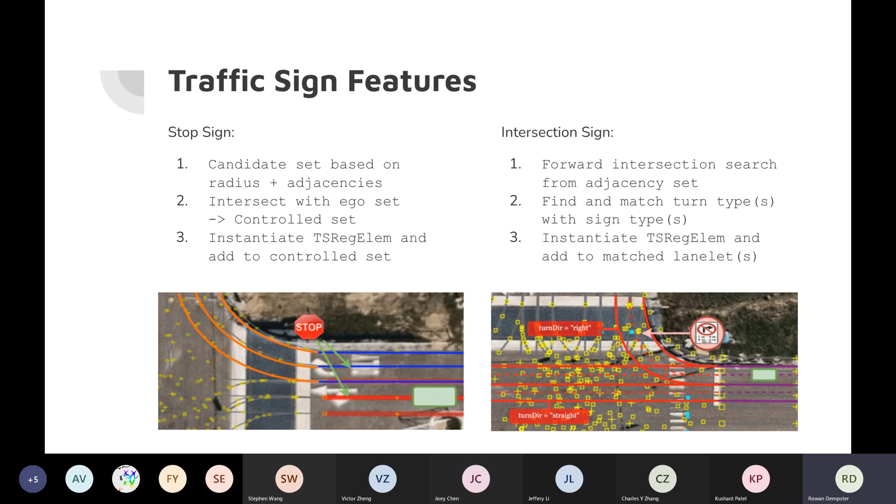And after we have these intersection lanelets, we match the type of the observed traffic sign to the intersection lanelets that it would influence or regulate. So a no right turn sign would, of course, regulate a right turning lanelet because it's applying a traffic rule to that lanelet, which is saying this lanelet is no longer passable. You cannot drive through it according to this traffic rule. So again, we instantiate a Lanelet2 regulatory element. And in this case, we would add that regulatory element to this lanelet. And in that way, we would model the relationship between the online detected sign and the a priori lanelet map.

Okay, so this technique expands to other heterogeneous features. So not just stop signs, but for example, construction blockages. It has a relationship with the lanelets that it is blocking.

So we first do some logic to check which lanelets the occupied area is blocking. We see if it's blocking all of the adjacent lanelets, so we wouldn't be able to simply switch lanes and avoid the blockage. We ensure that all of the lanelets are blocked. Then if that's the case, we instantiate an occupancy regulatory element and add it to all of these lanelets that

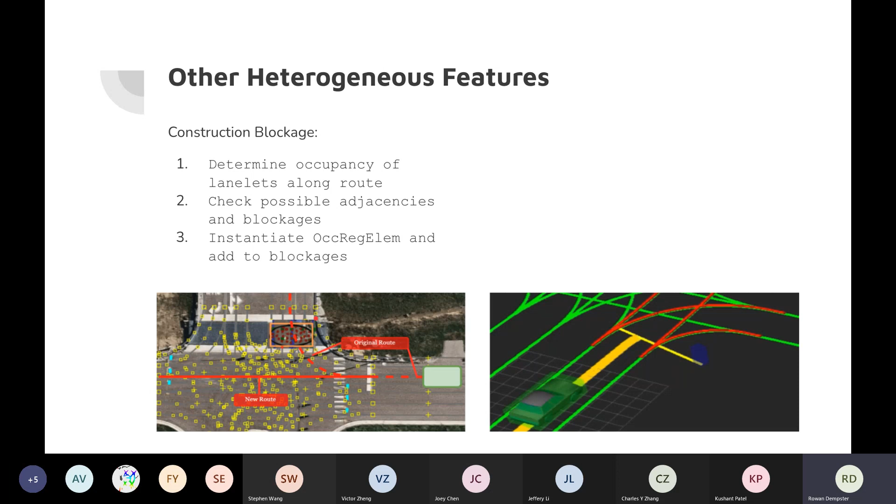are blocked. And in that way, during behavioral planning, we would be able to determine that our current lanelet route, which may have turned to the right, is no longer feasible. And we would be able to replan a new route that does not use these blocked lanelets, and that might go forwards.

And then lastly, we have pedestrian movement. And to model this, we have the predicted trajectory of the pedestrian given by the tracker. We generate a conflict set, which is either the intersection of the predicted trajectory with the bounds of lanelets, or if the pedestrian is stopped and waiting near a lanelet, that's also considered a conflict.

We calculate the stopping points using either the intersection or the closest point if the pedestrian is waiting. And then we instantiate another regulatory element that holds information about the stopping point and add it to each lanelet which is in the conflict set.

So in this way, we've once again created relationships between the online information of the pedestrian track and how it interacts with the a priori model. And we extract the relationship of conflicting from that information. You can see highlighted in red here are those conflicting lanelets.

Okay, this would probably be a good time to pause if anyone has any questions that they want to ask now.

Any other questions about this argument of reducing the complexity of the interaction? All right, so those are the main ideas that I wanted to get across today. Hopefully you have a better understanding of our motivations for having this environment modeling layer and how it's making our behavioral decisions a lot more simple to implement. So I'll just finish off here with a demonstration. This is the multimedia attachment that we're submitting along with our manuscript, and it's demonstrating the pedestrian feature model.

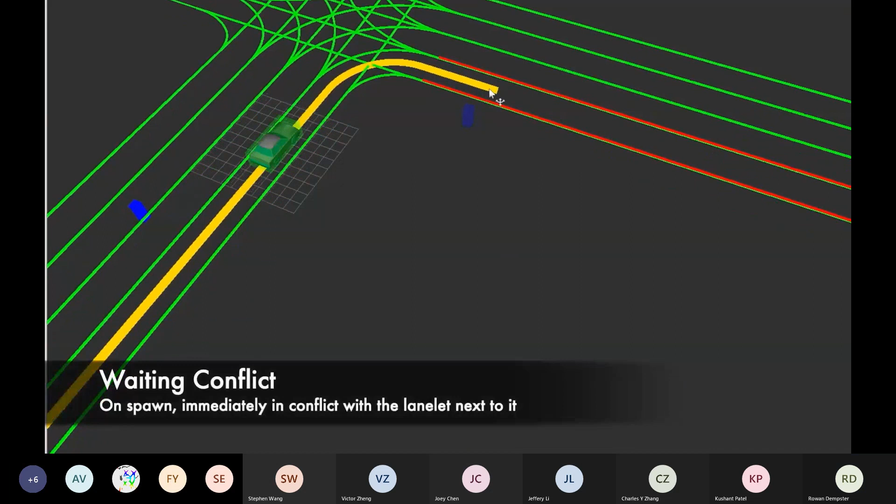So the pedestrian is in blue here, and as we see it spawn into the scene, it's in immediate conflict with the lanelet that was over here. But then as it starts to move around the environment, it's now in conflict with these lanelets up here, first by moving, but now because it's waiting.

And oopsies, did not mean to, just wanted to pause it.

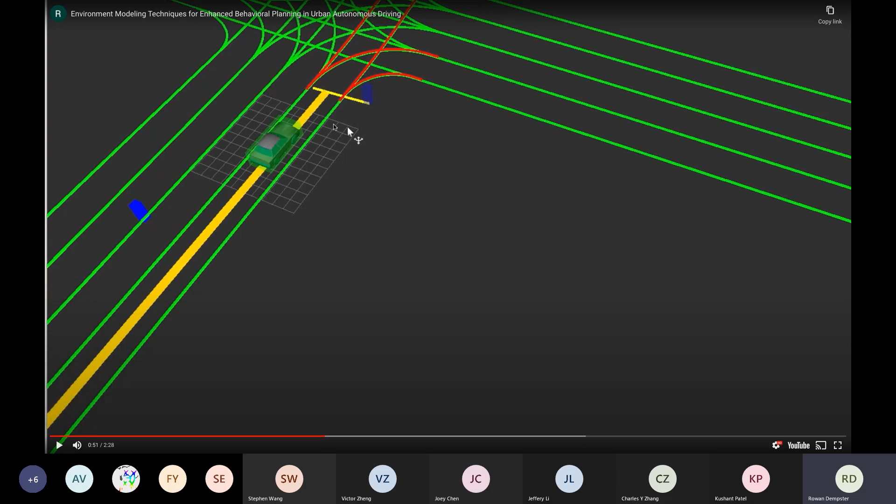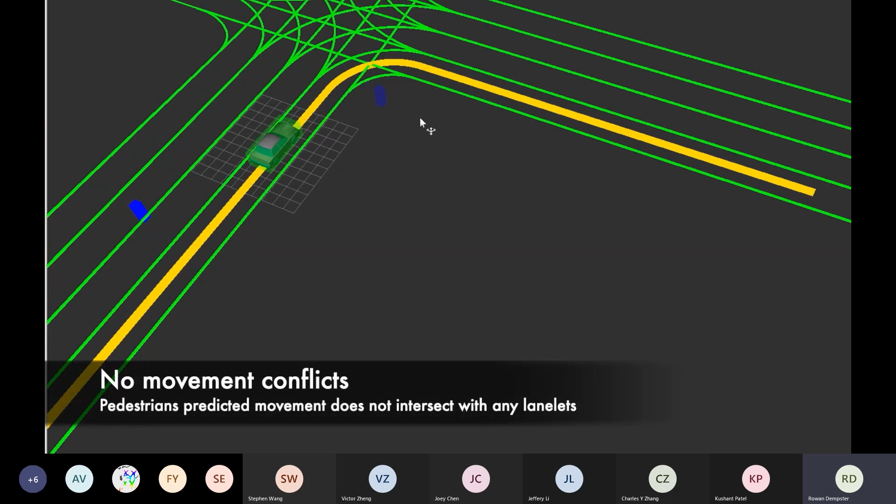And you can see the effect it's having on the behavioral planning as well, it's cutting off the reference path of the ego vehicle. After a certain period of time, the timer for waiting expires, so we can actually move past a pedestrian that's never crossing. And then as the pedestrian moves away from the intersection, it's no longer heading towards any lanelet, and we don't have any conflicts.

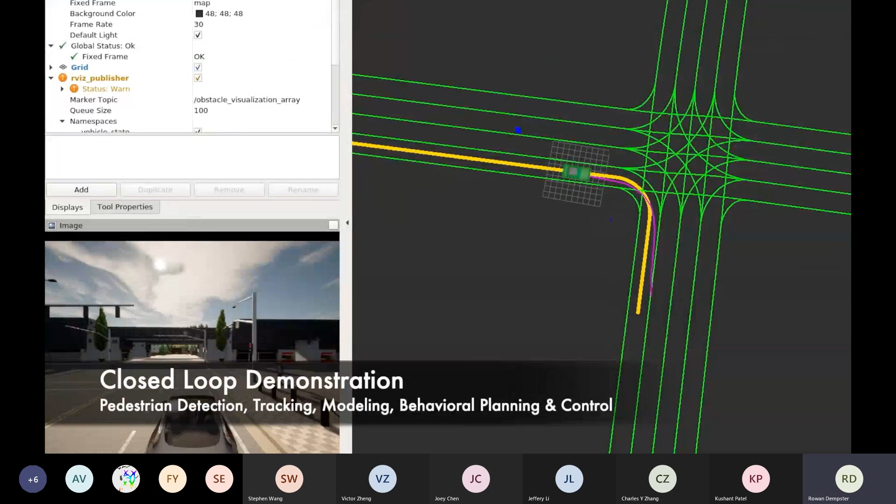So now we're going to do that same demonstration, but this time in a closed loop setting where we're actually using the perception stack. So that's what you're seeing here is the detection of the pedestrian in the camera frame, and then how our tracker predicts the trajectory of the pedestrian over time.

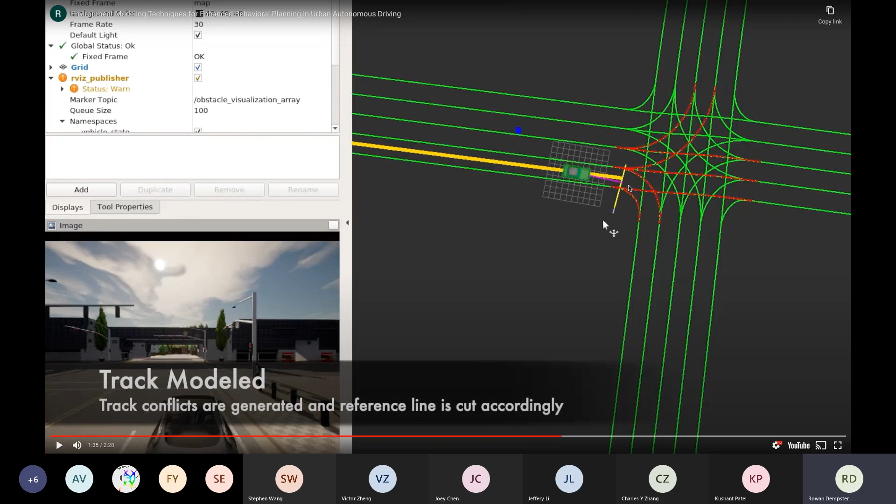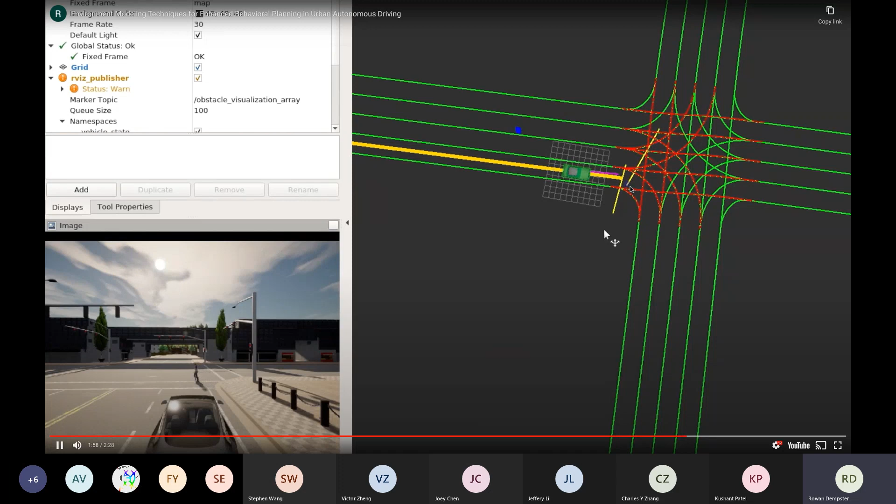And then in this top-down view, we're seeing how that predicted trajectory influences the a priori model, so where it conflicts with, and then how it also influences behavioral planning, cutting the reference line. So at this point, the tracker actually lost its original track, which is this yellow line here. And now we're seeing, to the software, what looks like a new pedestrian moving through the scene.

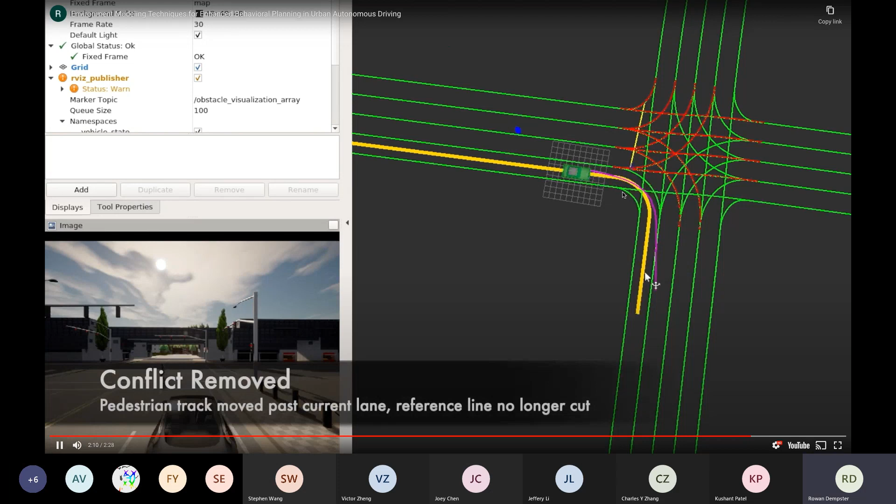But after a while, we will realize that we're not getting any information from that old track, and we remove it from the model. Then as the pedestrian moves fully past our lane, we're no longer conflicting with it, and the behavioral planner tells the ego vehicle that we're safe to move forward through the intersection.